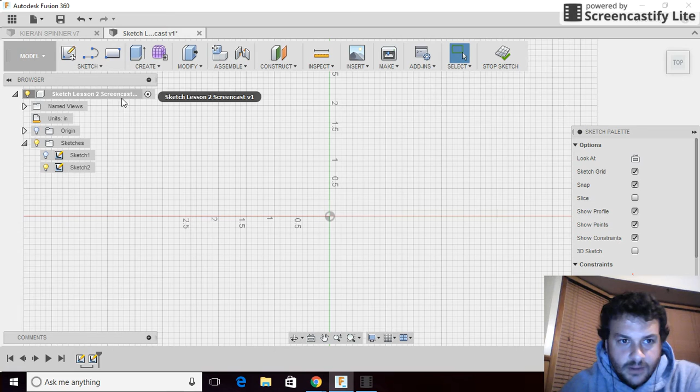So what we're going to do is create this iron as a sketch. I opened up a new document in Fusion 360. I named it Sketch Lesson 2 Screencast. So what I've got here is the actual project already completed, and I'm just going to walk through doing it again as a second sketch.

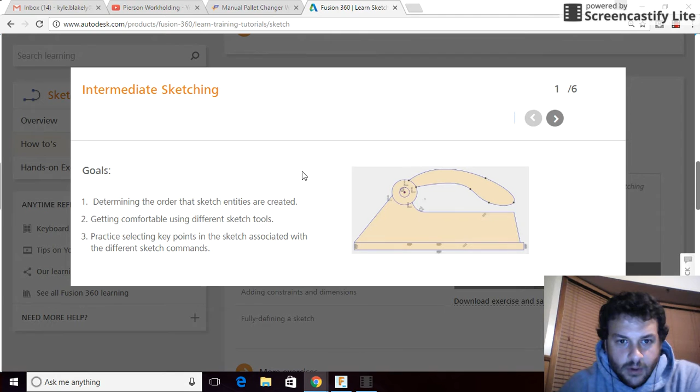So if we take a quick look at our instructions, the first thing it says to do is to determine the order of the entities you want to create and get comfortable with using some more advanced tools. Our second slide starts off telling us specifically what to use.

So we open a new document, that's already done. I always start by choosing the top plane for sketches so that I'm looking down at it from above, and then sketch the two entities that are pictured below, or to the side. So we've got this rectangle over here and a circle up above.

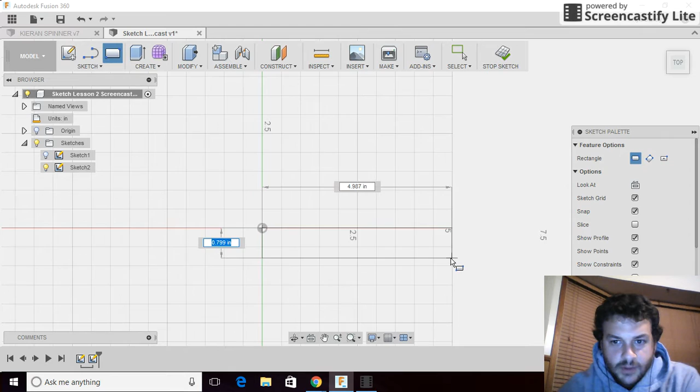Right, we can just click on the rectangle that's visible. Decide upon a length and a size. It's not too important, we'll go 1/2 inch by 5 inch. And then on the keyboard, if I click C for circle, I don't have to snap on anything else. I can just choose the size of a circle and good to go. So I've got my two entities done.

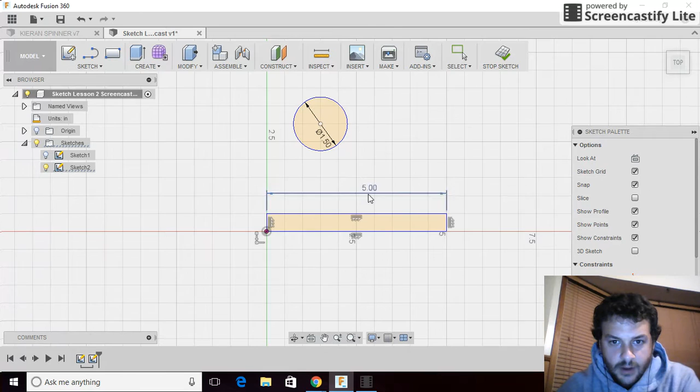I don't think they look quite as proportionate to what's been done in the lesson. So if I hit D for dimension, I can click on this line, snap it up, and make it 10 inches. So it's a little longer. So that's a little too long. Click on the 10 again, make it 7 inches, kind of split the difference a bit.

So now if we move back to the next screen or next slide, it'll tell us to connect the sketch on the left sides with one single line from the corner up to the circle. And then to complete the body of the iron, add 2 lines and an arc. Make sure a parallel constraint is used in between the horizontal line on the top of the rectangle and the

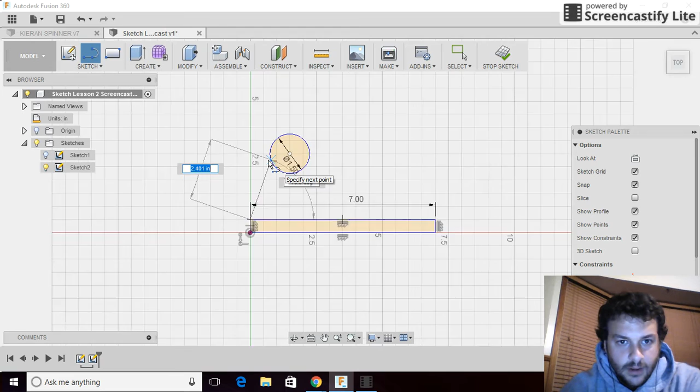top of the body. So if we flip back over, we've got one line, so L for line. Pick the corner of the rectangle, and you'll actually see the blue X highlight, so that you know that you're going to intersect with the outside of the circle. If I hit L for line again, and I hold to make sure that that blue X shows up, I know I'm on line with touching the side of the rectangle.

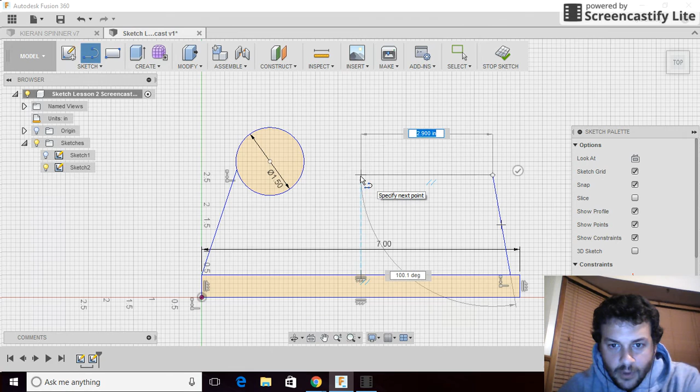Pick whatever line I want, and you can see the two blue hash marks that are showing up. That's telling me that I've got it parallel to the rectangle below. Now I'm going to bring this over a little further. I'm just going to pick a generic point.

The next tool we're going to use is an arc, a 3-point arc. So if we click on the end of that line we just created, and then we click on the side of the circle, we can snap and finish creating our body.

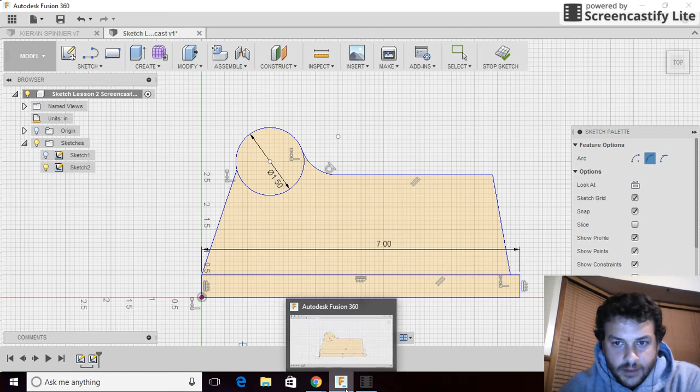So from there, we can go back to where we're at. We want to make sure that we have the parallel symbol, which you can see right here. It's telling us that these two lines are parallel with each other.

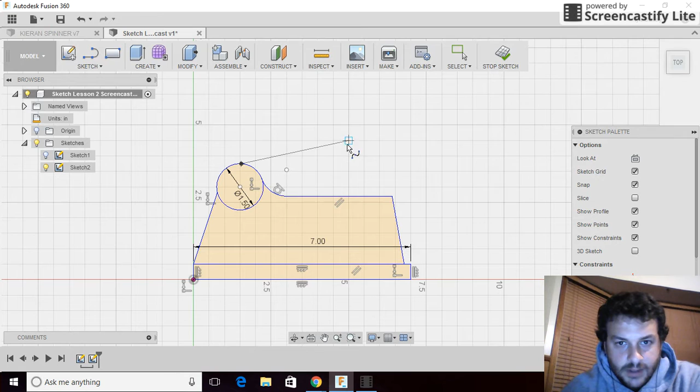Our next slide tells us to make a 6-point spline. So a spline is kind of like a free-flowing curve. It's not quite as exact as standard CAD techniques, but what it lets us do is kind of draw on the fly and come up with a shape that looks something like what we saw.

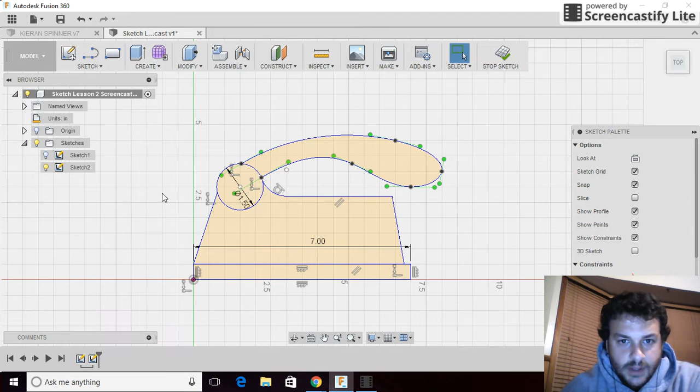And we double check, we've got 1, 2, 3, 4, 5, 6. So that's how we know we have our 6 points. And we're going to try and move them around and make it so it looks just like that handle, okay?

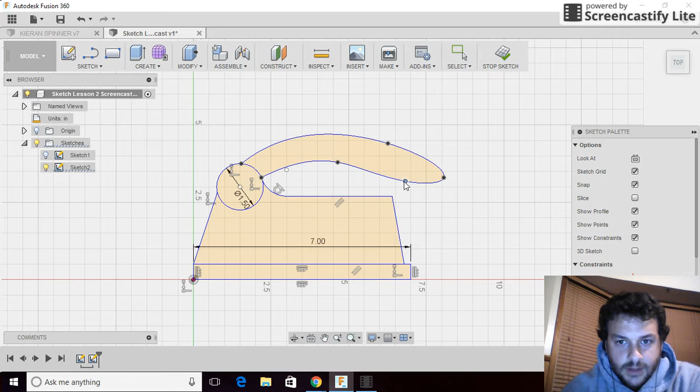When all of these green dots are showing up, you can grab an individual dot and modify your shape, coming up with something perhaps a bit more artistic than you'd normally be able to. If you move these around and drag them in different directions, you can keep working at it until you get the same shape as in the lesson. We'll call that good for now, switch back, and go to our next slide.

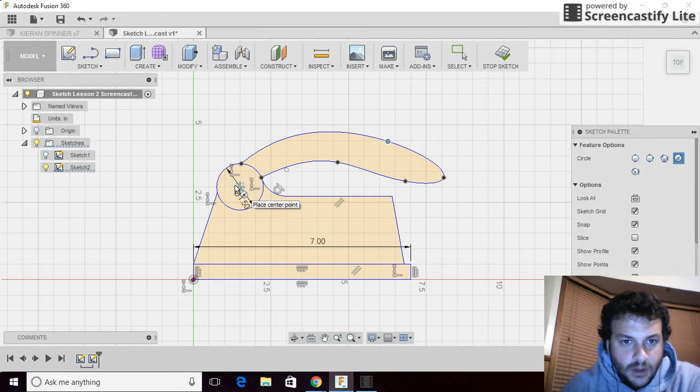Now it asks us to put a circle snapped at the center point of the original larger circle. Come back over to Fusion, hit C on the keyboard for circle, make sure you see the box appear. We're not going to be too picky, we're just going to pick any size we want.

From here, click back on our slide as we approach our last one, this is our self-check, so this is how we confirm we have all the right constraints in the right place. Move to the top right corner of the body, this part right here, and drag it down and to the left. Click on this corner and drag over this way, and we want to look and see if the outer circle gets larger and if the shape of the spline is changed.

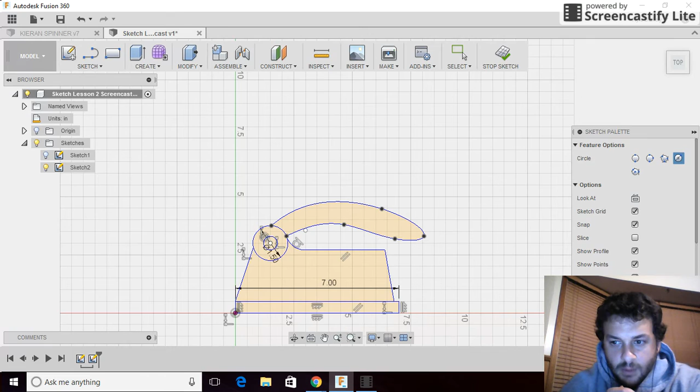So we should expect this circle to get larger when the spline changes. To make this work, we edit the sketch, click on this corner, and we can see the point changes, but our circle does not. So we've got to fix that, we've got to figure out why that is.

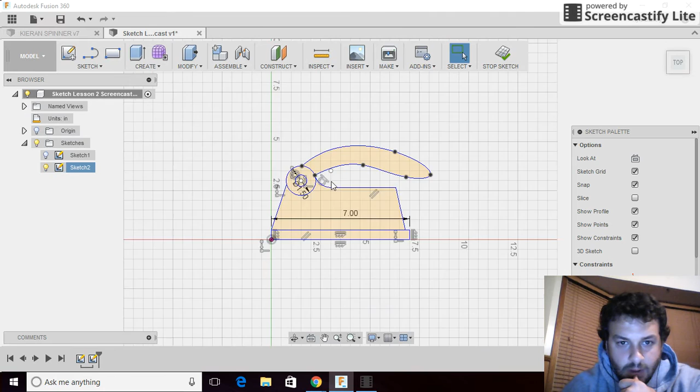So if we come back over and go edit sketch, you can take a look and see what we're missing, because there's something that's not quite right.

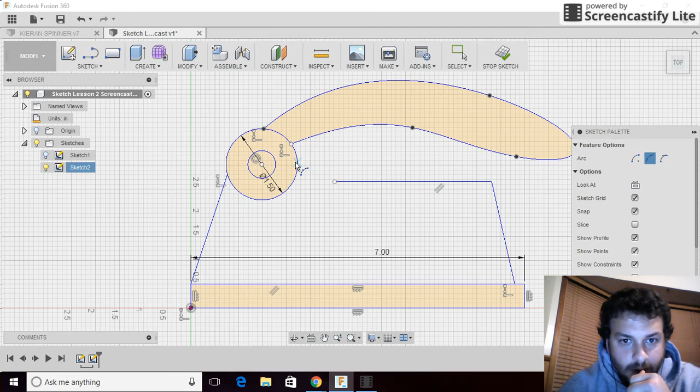Now we can move this point up further. Delete. And we're not going to have the arc intersect. That didn't work. Exit. We're going to go arc, 3 point. We're going to click on the circle below the handle, click on our line, and redraw that.

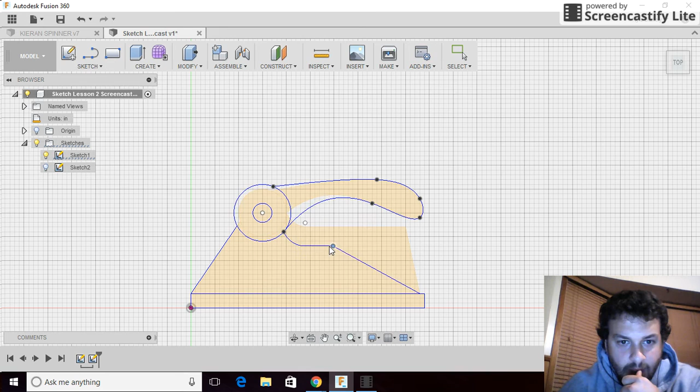All right, go back to our edit sketch. And if we highlight or hide that sketch for a second and come over to our other one, we can hide our second sketch. If I click on this corner, you can see that both the circle gets larger and the handle is modified.

If I close this and open up our other sketch, hide this, and come to this one, we see that right now nothing's happening, which is no good. So our second sketch has got some errors in it.

We still have our parallel constraints. We have our 5-point handle, two smaller and larger circles. And there's a constraint that we're missing somewhere up in here that isn't allowing this to work.

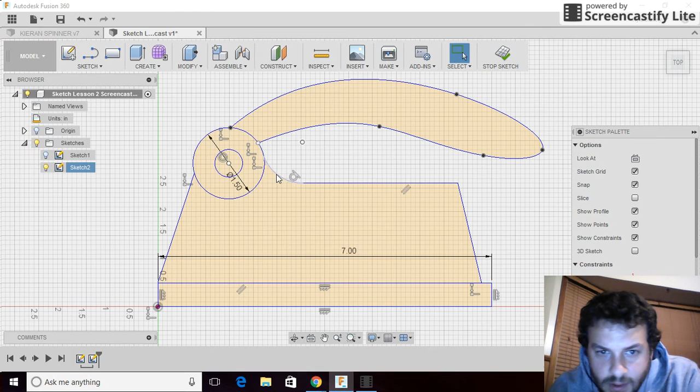So this arc constraint, let's take a quick look at what that is in Fusion. We've got our arc constraint, we've got 1, 2, 3, 4 for these guys, we've got our parallel constraints, and we stop our sketch.

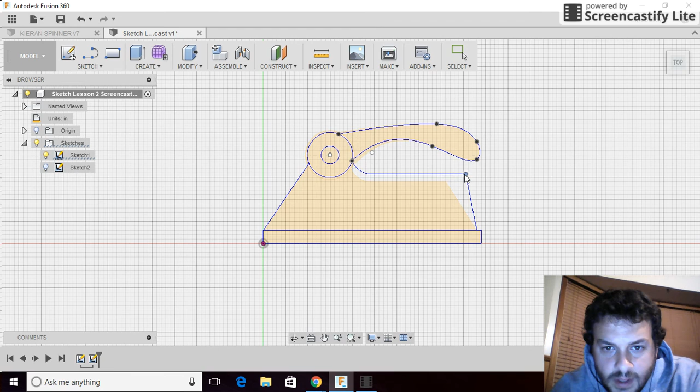And now all we get is those lines moving. But when you do the sketching exercise correctly and you drag this corner, you end up with both of them moving. So what we see that's different is our handle comes down to the arc, that's where they connect.

So we come back over, we hide that sketch, we turn on the sketch that does not work, and we go right click, edit sketch, click on this and we hit delete, move this arc further down the body. We use 3-point arc, click on that point, click on that point, something kind of like that.

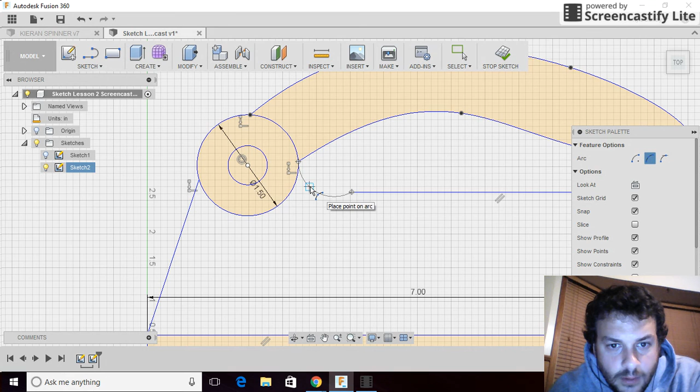We have a closed body. Then we should be able to stop our sketch. Stop sketch. We can get our lines to move.

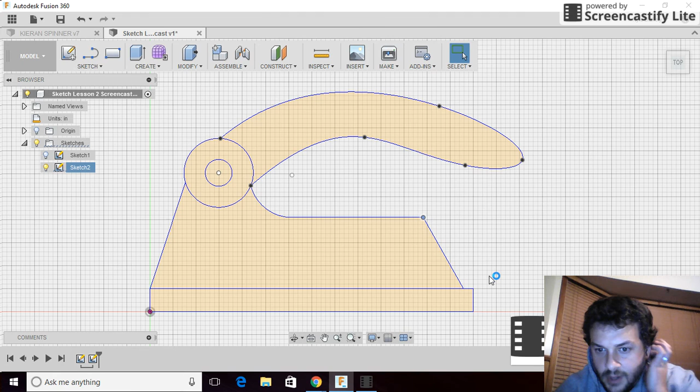So have a try at that, and see if you can follow it along and get the sketch to move correctly.